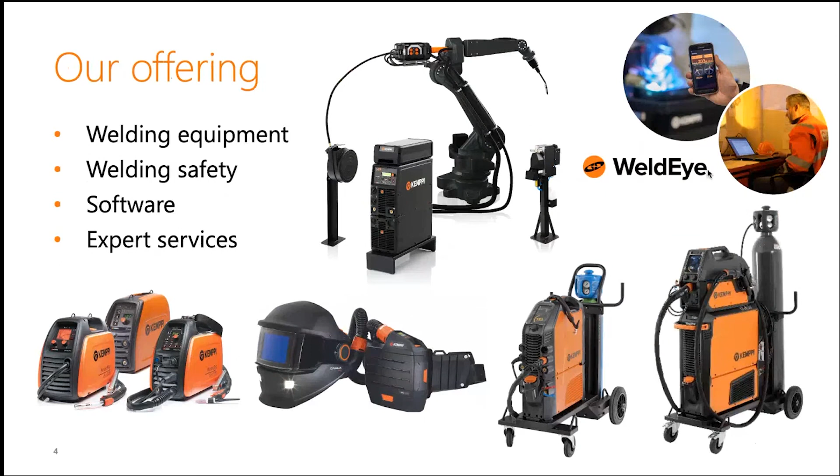Here is a snapshot of Kemppi's offering. Of course the main thing is the welding equipment itself, from portable, very compact machines to robotized solutions to system class solutions for industrial, demanding welding, and so on. In addition, we manufacture and sell our own welding safety equipment, such as these helmets, respirators, and so on. And on top of that, to make a complete package for the customers, we deliver software and digital services, connected to the welding itself and to the welding machines. I will tell you a few words about that later on.

And naturally, we have welding experts in our companies, meaning that we are able to solve customer problems, consult, and give training sessions and support overall when it comes to welding related questions and matters.

This is how we see the world. Wherever you go, you are never far from a weld. Kemppi's aim is to make the world a little bit more secure and safer place by offering solutions for quality welding. No matter where you are, you are usually pretty close to some kind of welding happening or structures that have been manufactured by welding. And our solutions, the Kemppi equipment together with the software, ensure a high quality level for the end products.

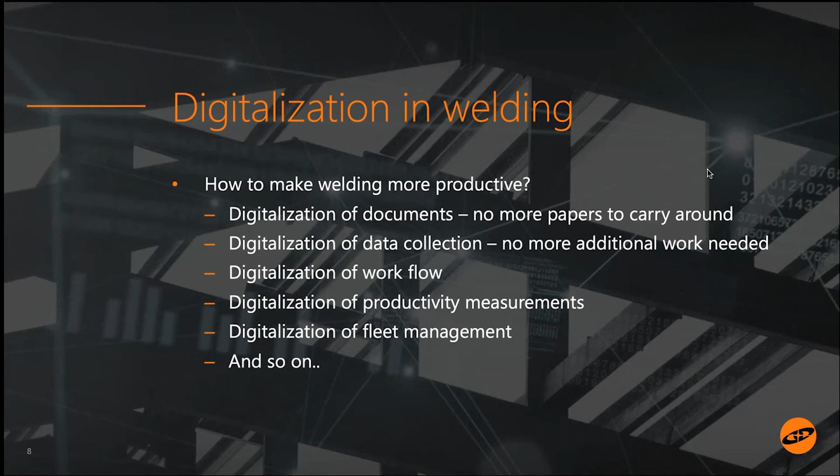And basically it offers you also a way to share these documents to the welders, because naturally the welders are able then to take a look at the WPS when they start the job, and then they're able to set up the welding machines. They're able to select the correct parent materials, the plates, pipes, and so on, to select the correct gas, select the filler wire, and so on, based on the information which is stated in the WPS document itself.

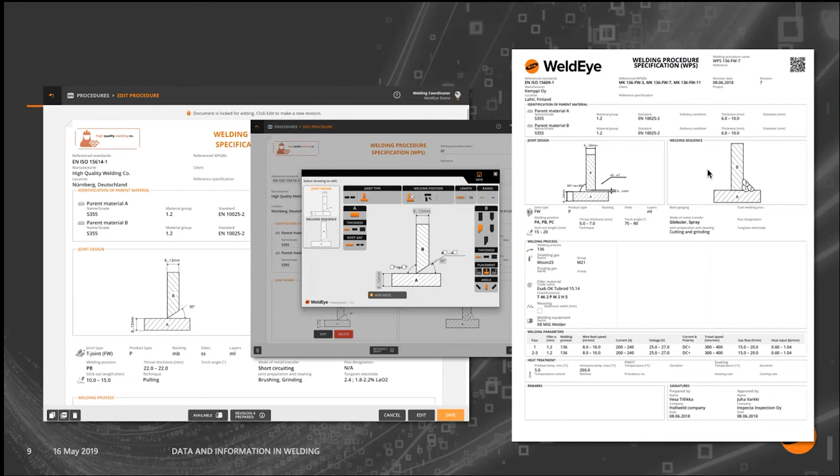In this picture, you're able to see basically this can be printed out, so it can still be a paper. But as I mentioned, why should you actually print any papers nowadays if you have more modern tools for it? The solution is that, for some Kemppi welders, we are able to send the digital WPSs directly to the welding machine itself. Basically, it means that when the welder is taking a look from his own welding station, he's able to see the library of the company's WPSs. And if he's selecting one procedure into use, it will actually also set the welding parameters based on this WPS.

One additional good point is that, now as you don't need to deliver or send any papers anymore to the welders, if you need to make some kind of a revision to the document, it is automatically then updated also in these digital WPSs. So they are not, by accident, welding based on the old revision anymore.

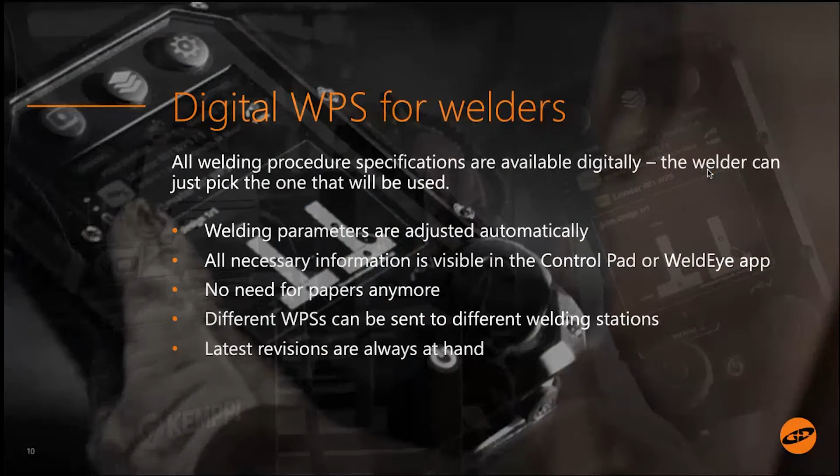And basically this is how it looks with this Kemppi X8 MIG welder, where we have the user interface directly showing the digital WPS's contents, also these pictures, for example. Basically it is showing the welder all the same information as stated or shown in this paper version. So everything is also visible through the welding machine itself.

Additionally, this data can be viewed from a mobile phone. We have a Kemppi app for it, called the WeldEye app. If you are using this WPS module, then all of your WPSs are automatically synced to this mobile app. And if your welders carry an Android phone in their pockets, they are able to access all of your WPSs through the app itself. In those cases, it does not automatically set the parameters on the welding machine, but at least the collection of WPSs is always on hand.

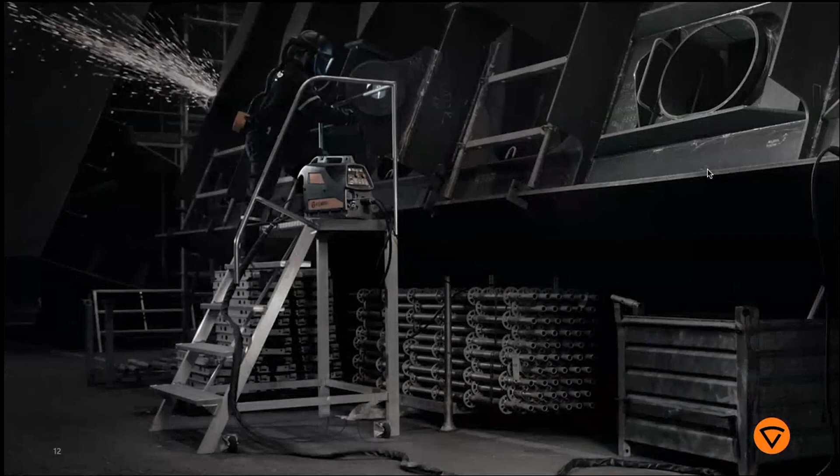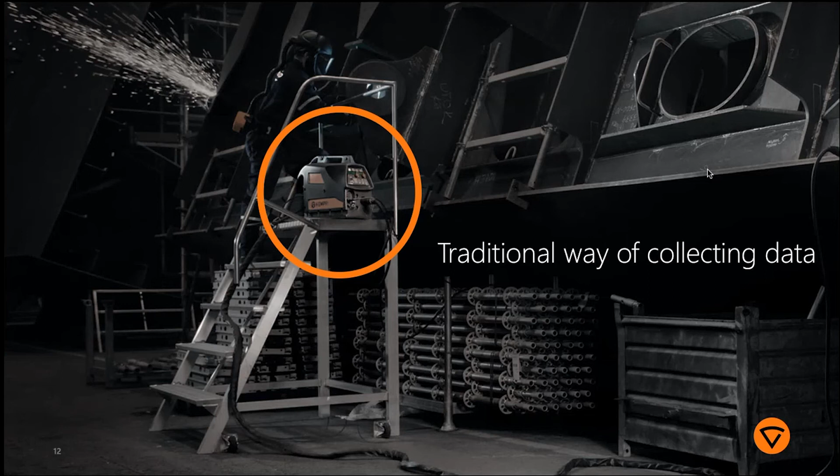Then the second thing, traceability, or let's say data collection from the welding. Sometimes you need to document the welding, meaning that you need to collect the welding parameters from the welding machine, or maybe not the actual welding parameters, but information on who has welded, what weld he has been welding, what WPS was used, the time and date it was welded, what filler was used, and what filler batch was used. The traditional way is to use pen and paper, or in this case, as you can hopefully see from the picture, the welder has been using a chalk marker right next to the weld, directly writing the information on the welded plates.

But what if this traceability could be collected digitally from the welding stations automatically? If this welder had been using the WeldEye app on his own or a company phone, he would have stated: I will start preparing this job, this weld. I'm using this wire. I'm this welder, so he would be logging in. I'm using this WPS and so on. At that point, all the data, who welded, which weld, piece or product was welded, when it was welded, which WPSs and parameters were used, and also the heat input can be verified for this welding job. So welding logs can be collected digitally directly from the source, meaning the welding machine and the welder while doing the job. No more papers to write down the welding logs.

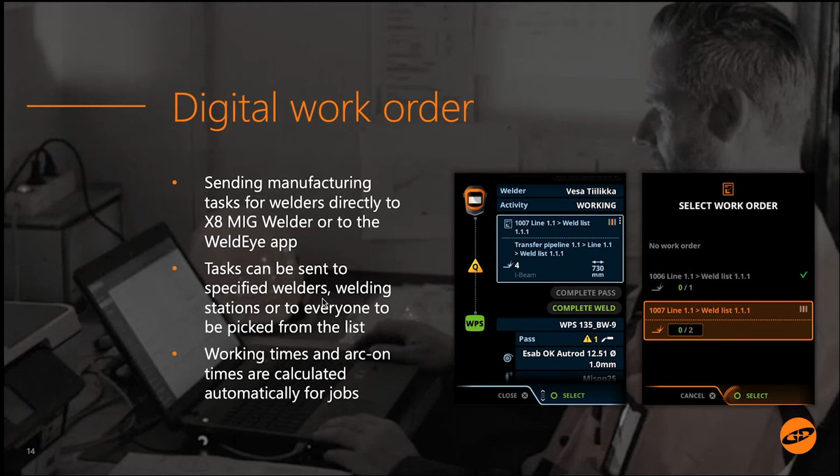And when the welders choose these jobs, we are also able to see the overall working time. So it gives you a measurement tool for the next time you are doing quotations to offer your projects. You know that last time you did it in, let's say, 300 hours overall, so you know how to calculate the pricing for the next quotations. If you know these things from the past, most probably you have been measuring them using stopwatches or whatsoever. So this is a digital way to measure the workflow and to manage it.

Then also productivity. Basically, this is not our main point with Weldeye. Quality is the main point in that sense, but you understand most probably that if we are collecting the welding parameters, if we are collecting the wire feed speeds and so on, then we are actually getting the productivity also. So we are collecting welding parameters, arc on time, wire feed speed, and so on.

And it means that this way we're able to see: are we suffering from some kind of bottlenecks in our production? Is there some kind of optimization needed? Are there some welding machines that are never used? Do we have enough welding machines, and so on? So basically some kind of statistical information related to the productivity issues also. That is provided by the Weldeye solution.

And overall, from this picture, you're able to see how the Weldeye app and connectivity is used with our almost brand new welding station, which is this MasterTIC from the Kemppi portfolio. In the background, you're able to see this kind of black box which states DCM. And this DCM is a connectivity device that we are connecting to the welding machine, and that's collecting the parameters and sending them to the Weldeye app itself.

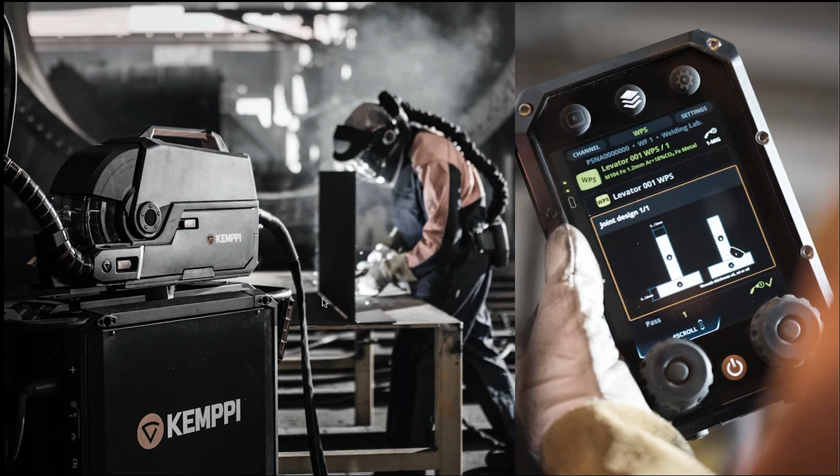This X8 welding machine that you saw previously in these pictures, where was it? Here. This one, for example, has the inbuilt connectivity to Weldeye. So the control pad on the right hand side is a part of the welding station itself. That's the remote panel for the welder, and it has the Weldeye functionalities inbuilt already. So if these machines are used, then you don't need to get anything separately in order to use Weldeye.

But when it comes to the other Kemppi welding stations, in this picture there is only a wire feeder visible, but that's for the FastMig series. So with the FastMig series, this kind of DCM, digital connectivity module, is needed. And then in this last picture that I showed you, the brand new MasterTIC, with that one also we are connecting using this digital connectivity module. So that's basically always needed in these Kemppi machine cases. But as I mentioned, the system is universal.

So that means that we have these devices called ARC adapters, and they are connected also to the alien machines, as somebody from Kemppi has stated. So basically, you are able to connect it also to ESAB machines, to Migatronic machines, to Fronius machines, and so on. So we have these additional devices to connect Weldeye also in these cases. And it is actually a fact that a large number of customers have started using the Weldeye system already, even though they haven't been Kemppi customers earlier. So this has been opening doors for us also, so that we are not locked only to the Kemppi offering.

And as mentioned, naturally from the Kemppi machines we are able to get the data collected more easily, and we are able to get, for example, wire consumption from the Kemppi machines only, but unfortunately it's not available for the competitors' welding machines. So there are these different aspects of the case, but overall we are providing a universal solution in that sense.

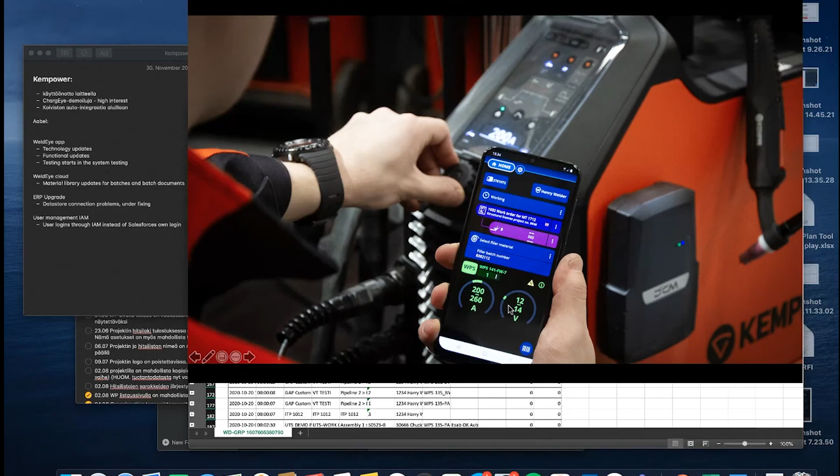It's certified welding procedure. It's regarding certification of the standard, that it is done by certificated standard. Yeah. Okay, let me see. I'm just thinking that I could basically show, because we do have a little bit of time still left, directly from the actual system how it is done.

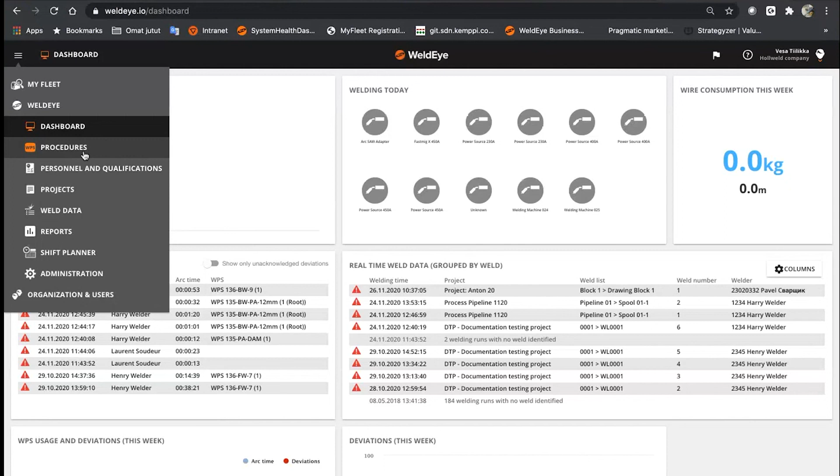So here we're going to WeldEye. And I assume that you're able to see my screen still. Yes. So in the welding procedures, when we create new ones, we have different options per different standard. So we have the EN ISO, then we have EN ISO as a dynamic layout, so it's almost the same. Then we have AWS supported, ASME. Well, this is pretty far from Iceland. This is Australian and New Zealand standards. And then there is also Japanese industrial standards supported.

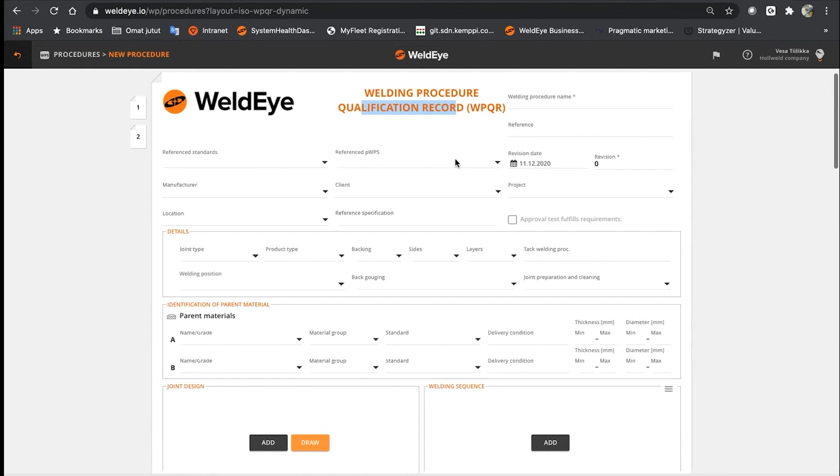But this WPQR, as you can see, it's pretty small letters there, but this WPQR layout is based on the ISO 15614 standard itself. And when the qualification record has been done, here we have the WPQR itself, and then the test results, and so on. Then those ones can be copied to the actual WPS layouts also. These are fulfilling the standard needs, but I'm not 100% sure what you meant by that. Are we able to verify based on the standard?

What I mean, if you are verifying some issue and you need to use 15614-1, and then you have to have the verified standard. Am I right? But how is it possible to show it, if it is in the machine or in the app or in the phone or something like that?

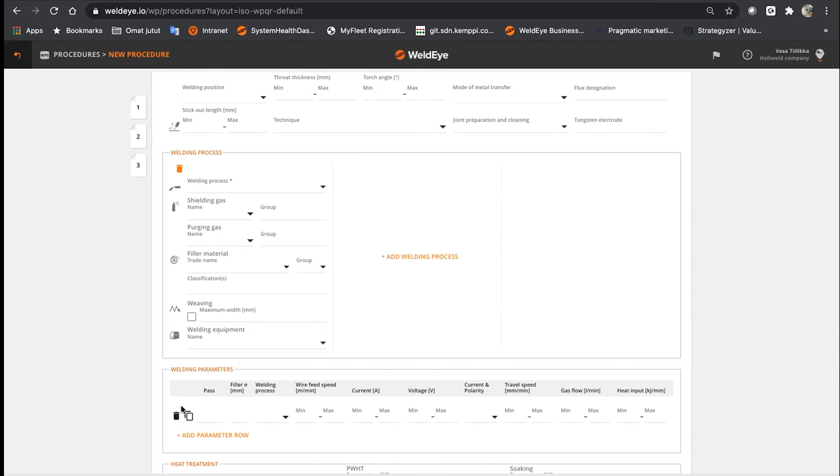Well, basically how the process goes is that when you do the welding procedure qualification test based on this standard stated here, then you basically fill in this record of the weld test. All of the results from your test are put here, to this page. What was the process that you used? What were the welding parameters that you used? If you want to fill out the test results from the test piece, they are added also here.

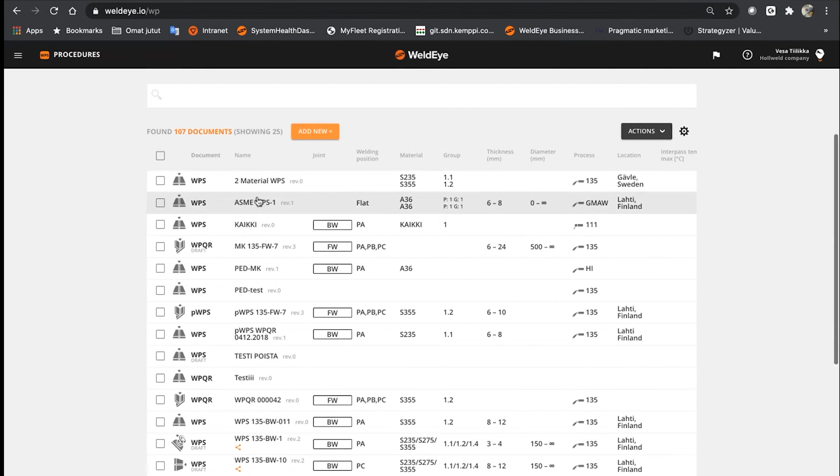And then the range of approval, because this 15614 has some rules inside of it. So there is this range of qualification, and you need to fill in this one also to see where you are qualified with this procedure. And based on that, you are able to create the official WPSs. For example, here is a Kemppi Universal WPS that we are actually also selling from Kemppi.

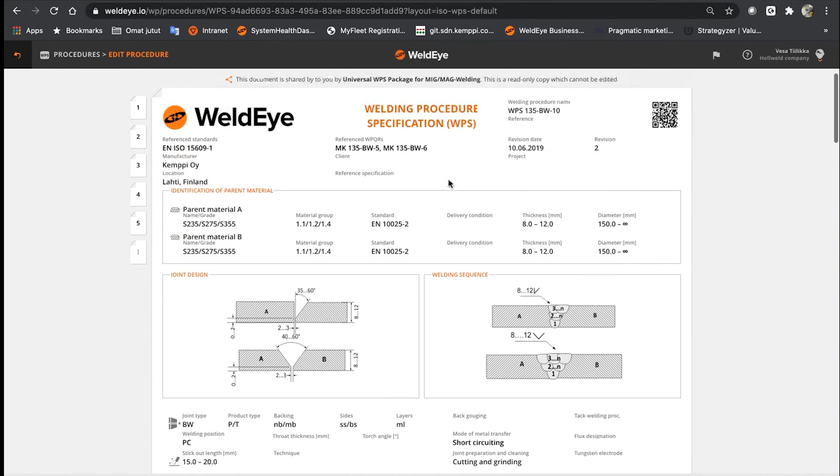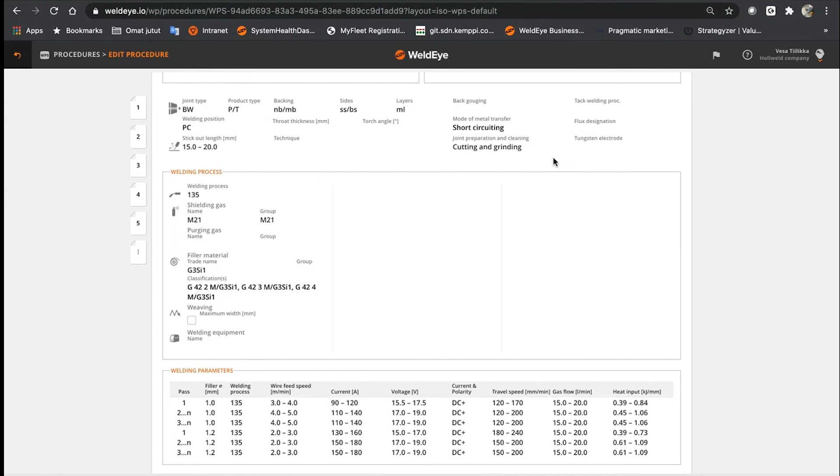As you're able to see here, this is the actual WPS that the welders are following when they weld, if they need to do this kind of a joint type, for example. But if you mean that you need to actually show that you are following the WPS, then the welder selects this WPS from the phone itself, that now I will be welding based on this WPS.

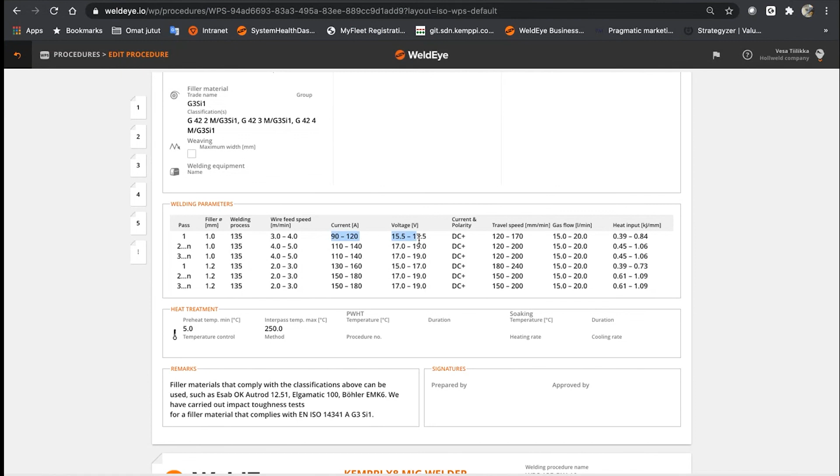And when we measure the welding parameters from the welding station, they are then compared to these parameter limits stated here. So we are actually measuring current and voltage. And if the welder is not following these parameters, then there will be a deviation in the system. And it looks like this. Let me see. Here.

So now in this case, Henry Welder was the welder. He was welding actually 14 minutes, so it was a pretty long weld in that sense. He was using this kind of a WPS, this kind of a welding station. Filler material used was the basic ESAB OK Autrod, for example.

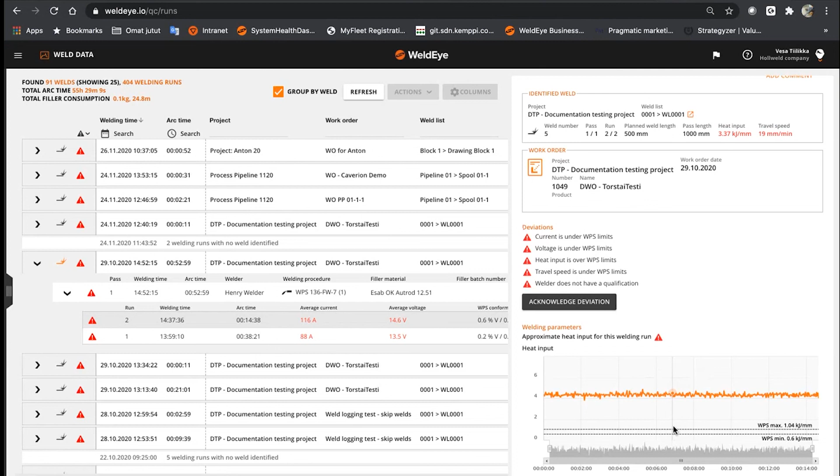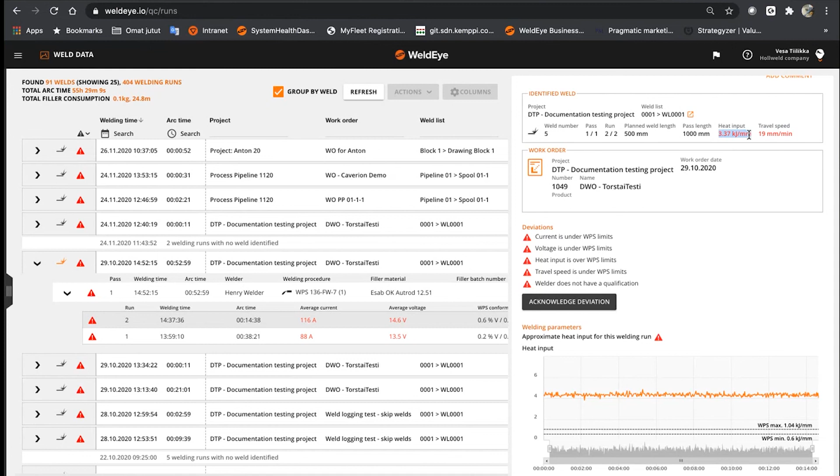And we can see that the welder was using way too small current. Also, the voltage was really low based on the WPS itself. But as the welding speed was really low here, it seems actually no progress at all, it caused the heat input to be really high, way over the limit.

So this is how you are able to verify the quality, whether the procedure has been welded according to the actual planning. And there is another.

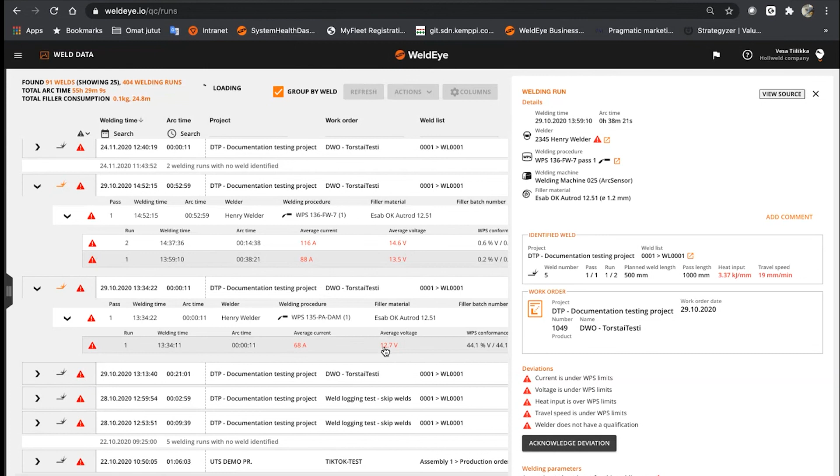Here we have a little bit shorter weld. You can see that the welding has been going on somewhere around 60 to 80 amps, but the welder should have been using 200 amps or more. And the same with the voltage also. So once again, there is a potential for welding defects.

These kind of digital tools don't have an effect on the welding machine itself. The main business of the welding machine is still to produce high quality welds. But outside of the welding station, there are a lot of things happening in the workshops that need data collection, some kind of digitalization, and so on.

And cloud systems like this WELDEYE software bring additional value for the customer, because then they are able to connect more to the welding process itself. It's not about the actual weld only anymore. It's about the documentation related to the welding, the efficiency of the welding, quality of the welding, and so on. All these things come together.

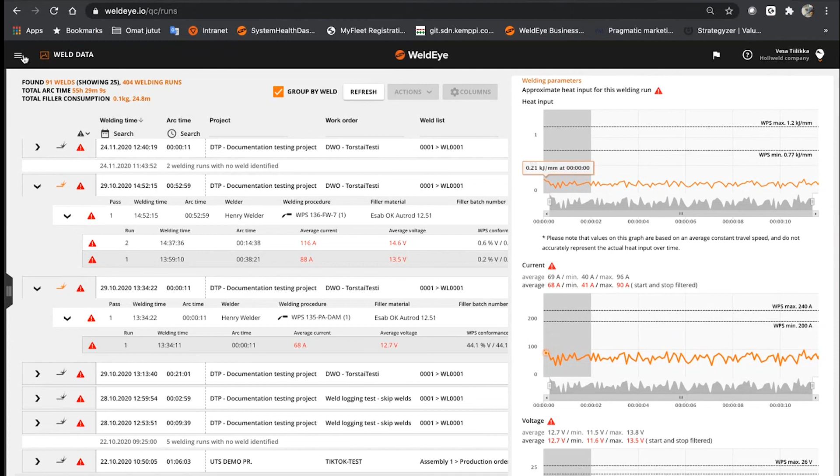Yes, exactly, and make it so it works with the government, and they take the new WPS as a legal document. Yeah, well, that is a possibility, and these are the ones that we have been adding once in a while when the customers have been asking. It doesn't matter if it is coming from some kind of a local standard, or if it's even, let's say, a big group of companies or a big company who has their own WPS layout, and they would like to add that one to the system. So we are able to do both of these.

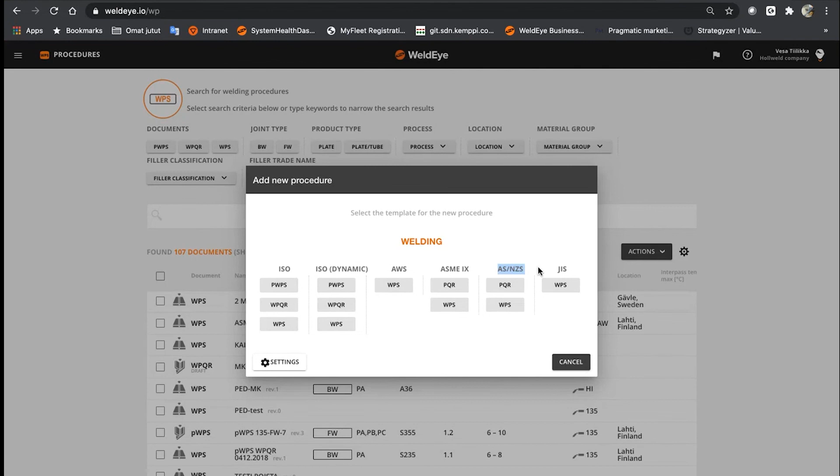So we are able to add the support for new standards, and we are able to add also customized local standards for the customers if they need to have some kind of a layout of their own in the system. So that's not a problem. For example, we didn't start Weldeye with the Australian and New Zealand standard, but nowadays, as we do have a strong subsidiary in the Australian and New Zealand market, we were basically forced to add support for these Australian standards in the system, because we were getting customers using Weldeye, but they needed the support for the local standard also. So these are fully compatible.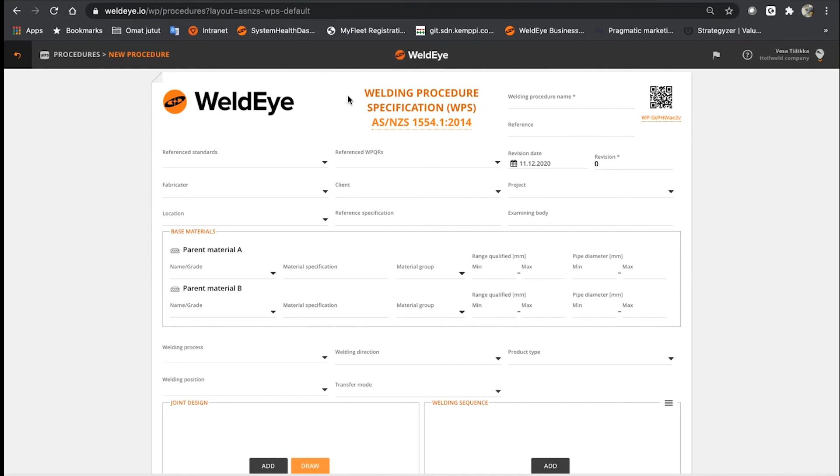Okay. Another question: for the inspector, when he takes out the project, if he wants to see welding number 21, is it possible to show him the heat, the wire per minute, and everything that we are using through Weldeye? Yeah, that's correct. If you are using the projects from the system itself, let me see. I have here my demo projects, so to speak. Did I have any welding? I think I had. So for example, now there is this process pipeline project, and I have a part of the pipeline called pipeline 01, pipeline 02, and so on. So I have been cutting the project into smaller pieces in this structure. We call it the tree structure.

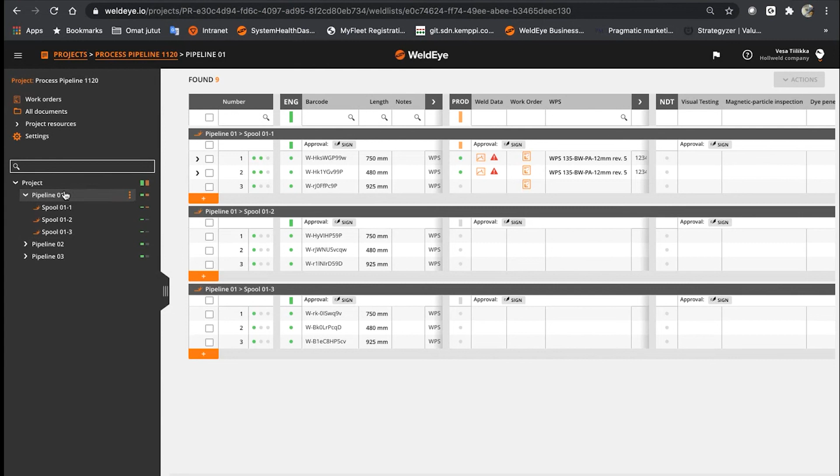And under pipeline 1, I have, for example, the spool 01-1. And this small pipe spool has been welded with 3 different welds. And now I am able to see how, for example, weld number 2 was done. So this way you're able to find all of the welds done. I'm able to see that it was Harry Welder doing it. He was using the WPS 135, BW, PA, and so on. I'm able to see what filler materials were used, what filler batches, and if I click here, I'm able to see also the travel speed calculated and also the average heat input calculated for this weld. So everything is documented when it comes to this specific welding.

And in the end, maybe you have 10 welds, maybe 50 welds, or 500 welds or 5,000 welds in your project, but they are all stored in these tables, and you have the full traceability after the project has been completed in the welding log itself. And you are able to export the documentation also using the system. So you're able to get a document package where you have the drawings of your project listed and attached. You have the welding logs attached. You have all of the WPQRs and the WPSs used for this project. You have all of the batch certificates for the materials attached to the project automatically.

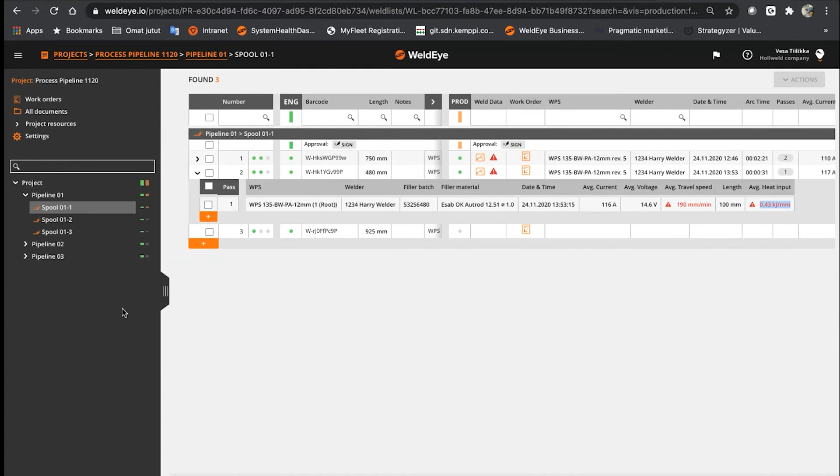Everything is connected, and then they are available from this documentation tool. We have here the export documentation function. So here you just select which documents you want to export as a package. So there are a lot of these kind of options.

Okay, thank you. But last question, sorry. If I have an original version of Weldeye, the first edition, is it possible for me to transfer all the documents from that software over to the new Weldeye? Yeah, basically that's also a possibility, and we may have also some possibilities to connect these two systems together. So if you're using the traditional, let's say, original version of Weldeye, that's also a possibility. We are able to discuss these details separately if you would like to.

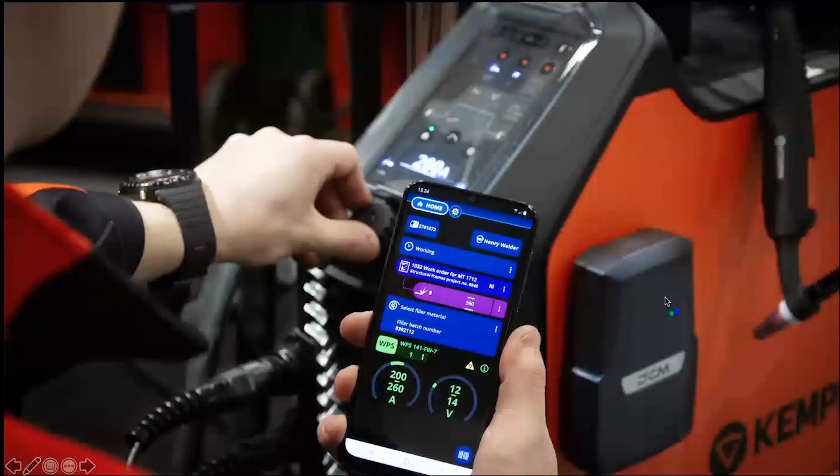Thank you so much. Okay, my time is unfortunately running out, so I will go back to the slide set here.